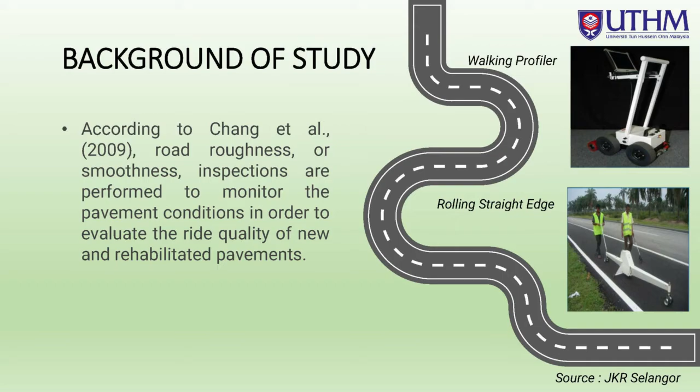According to Chang et al. 2009, road roughness or smoothness inspections are performed to monitor the pavement conditions in order to evaluate the ride quality of new and rehabilitated pavements. Based on the introduction given, these are the problem statements. According to Mamlouk et al. 2018, the performance of the pavement roughness can contribute to the probability of increased accident rates.

As the length of roadways and the number of vehicles on the road continue to grow, road maintenance and repair will face significant challenges. The road maintenance and repair agency, Jabatan Kerja Raya, has been confronted with major issues, particularly in terms of prioritization in recent years. As a result, the focus of this study will be on FT 005, which is a Federal Road in Muar District, Johor, in order to determine whether there is a correlation between pavement roughness and accident rates.

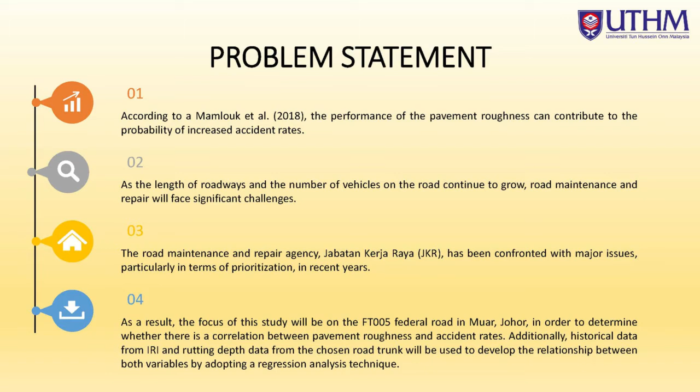Additionally, historical data from the IRI and rutting depth data from the chosen road trunk will be used to develop the relationship between both variables by adopting a regression analysis technique. From the problem statements given, these are the objectives of study. Number 1, to identify the correlation between the IRI rating and the possibility of accident rates. Number 2, to determine the relationships between IRI and rutting using regression analysis on historical data. And number 3, to develop IRI performance models in Muar federal roads.

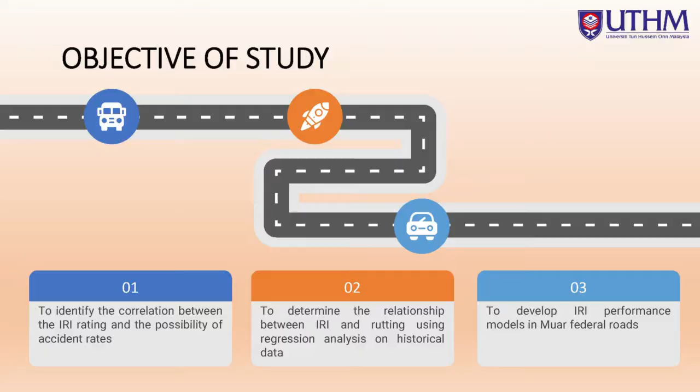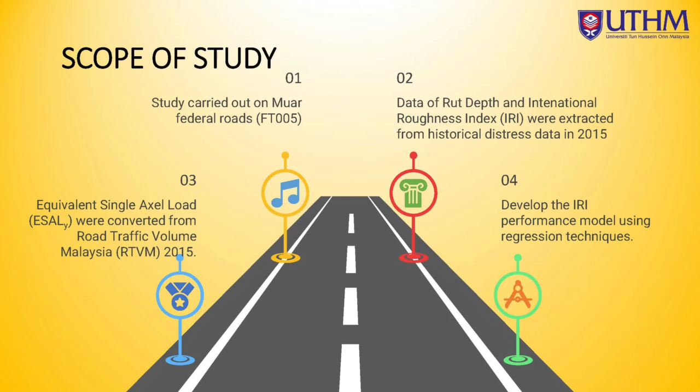And now, let me explain about the scope of the study. First, the study was carried out on Muar Federal Road, which is FT 005. Number 2, data of rut depth and International Roughness Index, IRI, were extracted from historical distress data in 2015. Number 3, equivalent single axle loads were converted from Road Traffic Volume Malaysia, RTVM 2015, which is produced by Jabatan Kerja Raya Malaysia. And lastly, develop the IRI performance model using the regression technique.

According to JKR 2019, federal roads are the network of roads gazetted under the Ministry of Works. For the record, there is a total length of 19,912 km of road trunk, including Sabah and Sarawak, as shown in the figure on the right of the screen. Under the Federal Ordinance 1959, all federal roads have been placed under the responsibility of the Ministry of Works, which includes management, maintenance, and construction of new trunks.

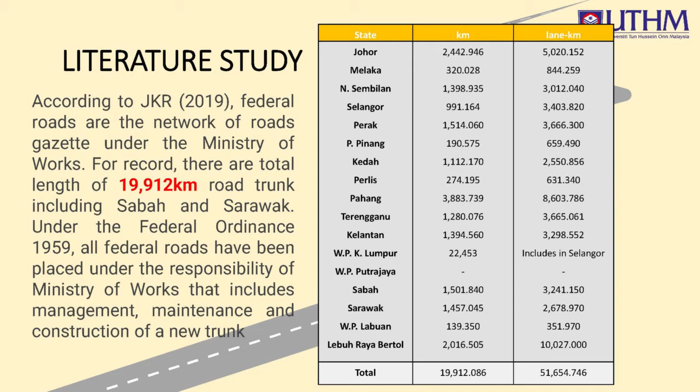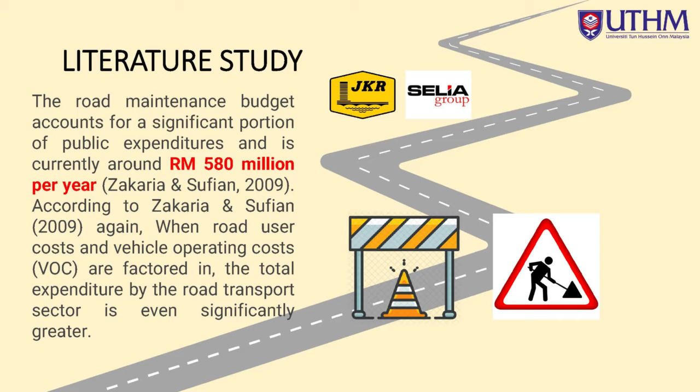The road maintenance budget accounts for a significant portion of public expenditures and is currently around Ringgit Malaysia 580 million per year. According to Zakaria and Sufian, again, when road user cost and vehicle operating costs (VOC) are factored in, the total expenditure by the road transport sector is even significantly greater.

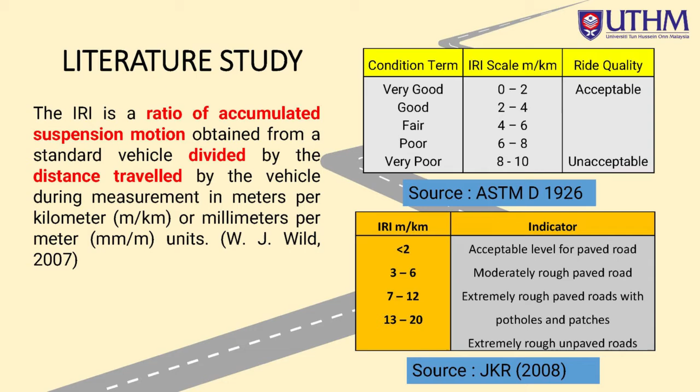Now, let's see what the International Roughness Index is all about. The International Roughness Index (IRI) is a ratio of accumulated suspension motion obtained from a standard vehicle divided by the distance travelled by the vehicle during measurement, in meters per kilometer or millimeters per meter units. The tables on the right will explain briefly the condition term and IRI scale according to ASTM D 1926 and Jabatan Kerja Raya.

This literature study continued with the probability of accident rate that comes from the road roughness. Accident rate is affected by several factors such as human factors, vehicular causes, environment, roadway geometry, traffic volume, pavement condition, and their combinations. Pavement condition, however, causes a small percentage of accidents as compared to human factors, according to Nair Baskara et al. 2016.

In southern Queensland, Australia, King 2014 had found the correlation between crash rate versus average road roughness, as shown on the right figure. Other than that, he also plotted the data of property damage per year caused by the crash events.

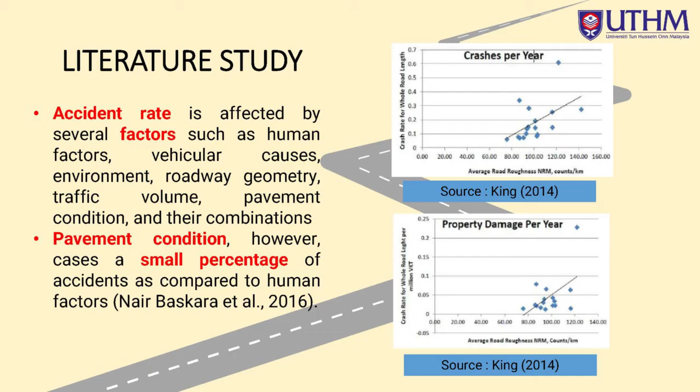Now let's dig into the methodology of the study. The study begins with the problem statement as discussed in the earlier video. From there, the objectives and the scope of the study have been determined. To understand more deeply, a literature study has been undertaken systematically. To tackle the study objectives, the first part of the literature will cover the journals and papers that describe the correlation between accident rates and pavement roughness to answer the number one objective.

Secondly, the understanding is focused on IRI application and implementation, plus the derivation of the formula to correlate between IRI and the rutting data. And lastly, IRI performance models for federal roads can be developed. Not to be forgotten either, learning and hands-on of SPSS software in order to continue the regression data analysis later on.

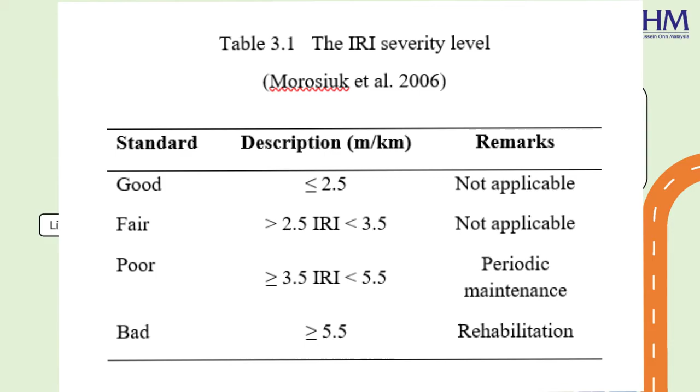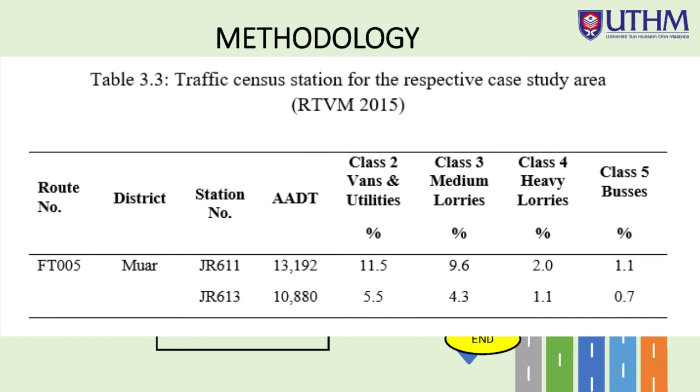For the data collection, the raw data for the IRI and rut depth in this study were segmented into 200 meter and 500 meter segments. The severity of IRI and rut depth is as shown in the figure. Other than that, the traffic census station data from the RTVM 2015 is needed in the determination and interpretation of ESAL, as shown in the figure. From those data, the equation has been derived as shown on the screen.

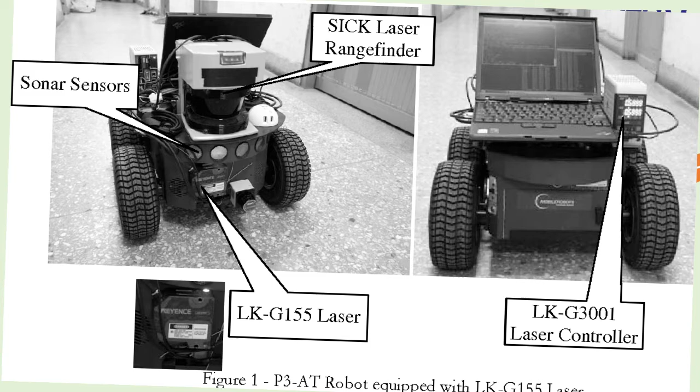There are various types of equipment setup for getting IRI and rut depth data. For example, Chang et al. 2009 used an autonomous robot to measure the IRI. In this study, the data was measured by using multiple laser profiler equipment. Data was recorded for every 100 meter interval in both traffic flow directions.

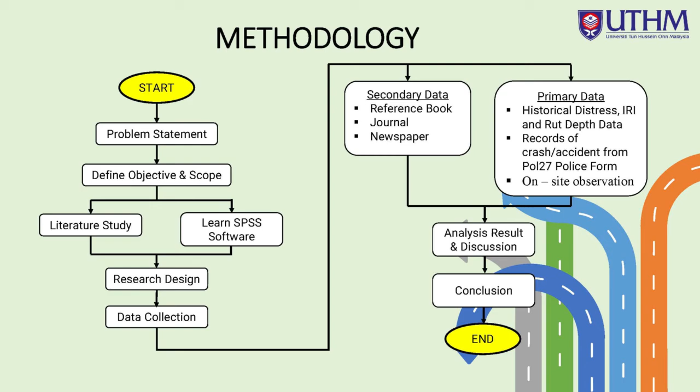Next, by using the Statistical Package for the Social Sciences (SPSS) software, the multiple linear regression and simple linear regression will be determined. For data validation purposes, in order to determine how correlated the independent variable and dependent variable were, the multiple correlation coefficient R was calculated. Known as the coefficient of determination, R squared represents the proportion of variance in the dependent variable that is affected by the independent variable when two variables are compared.

The R squared is a common indicator that has been used in various studies to determine how well a model performs in terms of accuracy. The accuracy is greatest when the value of R squared is close to 1 or 100%.

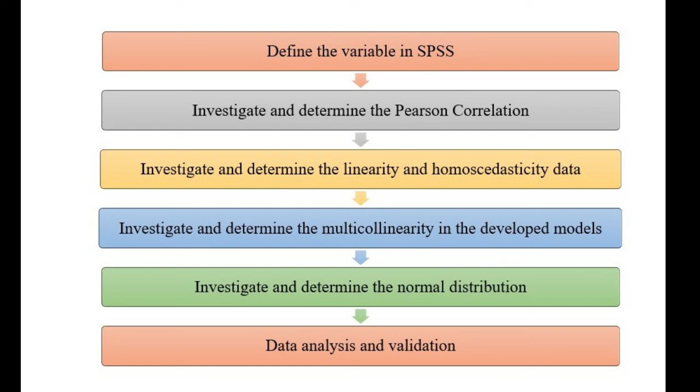And now, let's jump to the expected results. This study expects three hypotheses. Firstly, the prediction that the IRI rating has a minimum contribution towards road accidents. Number two, the results of the regression analysis, whether simple or multiple linear regression, are interpreted based on statistical significance. And lastly, the predicted performance model will help in road maintenance and rehabilitation programs and planning.